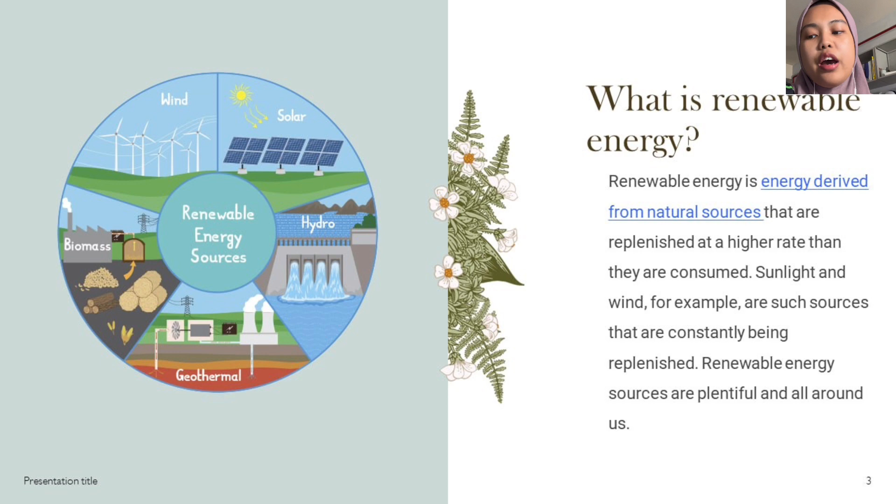What's good about renewable energy? Generating renewable energy creates far lower emissions than burning fossil fuel. Transitioning from fossil fuel, which currently accounts for a lion's share of emissions, to renewable energy is key to addressing the climate crisis.

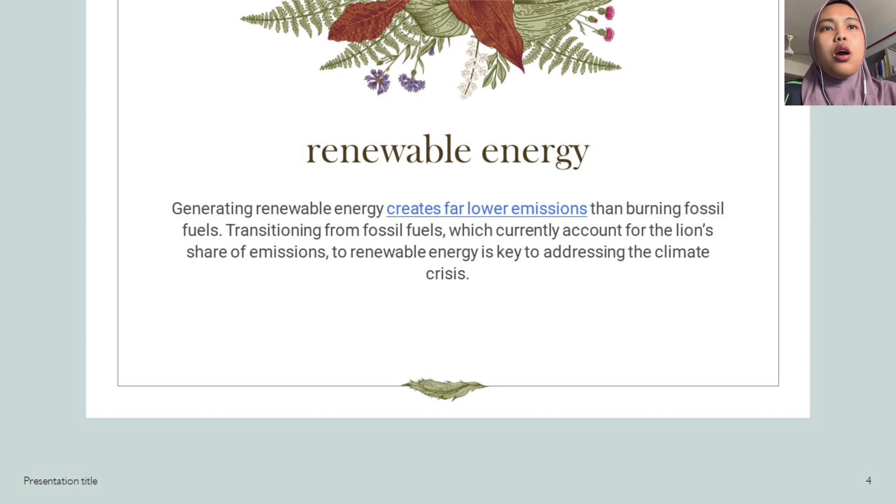Okay, renewable thermal technologies. Renewable energy sources provide heating and cooling service for space heating and cooling, domestic hot water, process heating, and cooking. Renewable thermal technologies can use a variety of renewable energy sources that would otherwise be wasted, such as waste energy from industrial processes or biomass burning.

Renewable thermal technologies vary in the thermal temperatures at which they deliver heating and cooling. Temperature levels are important to define the suitability of different technologies for meeting specific heat requirements in the various end-use sectors. Renewable thermal technologies can range from small domestic applications to larger scale applications used in industrial processes and district heating and cooling networks.

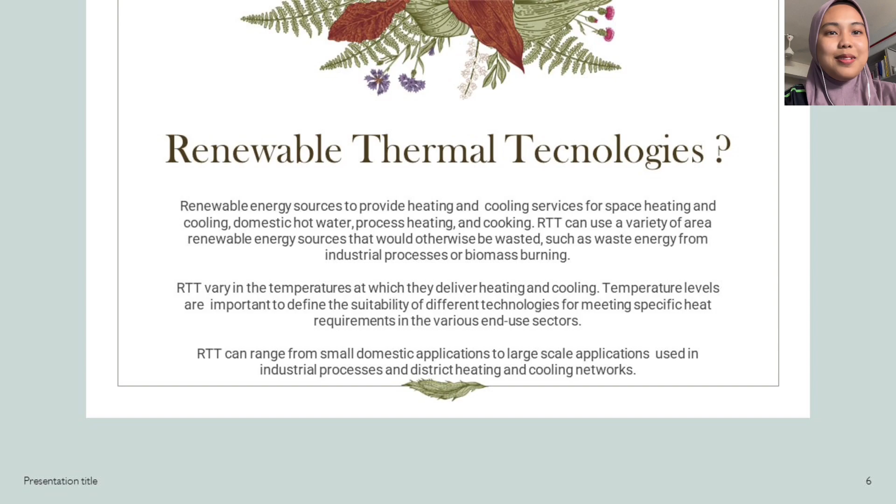Okay, next is what is geothermal energy? Geothermal energy is heat energy from the earth - geo, which is earth, plus thermal, heat. Geothermal resources are reservoirs of hot water that exist or are human-made at varying temperature and depth below the Earth's surface. Geothermal technology exploits thermal energy in the Earth's interior, stored either in rock, liquid water, or trapped steam.

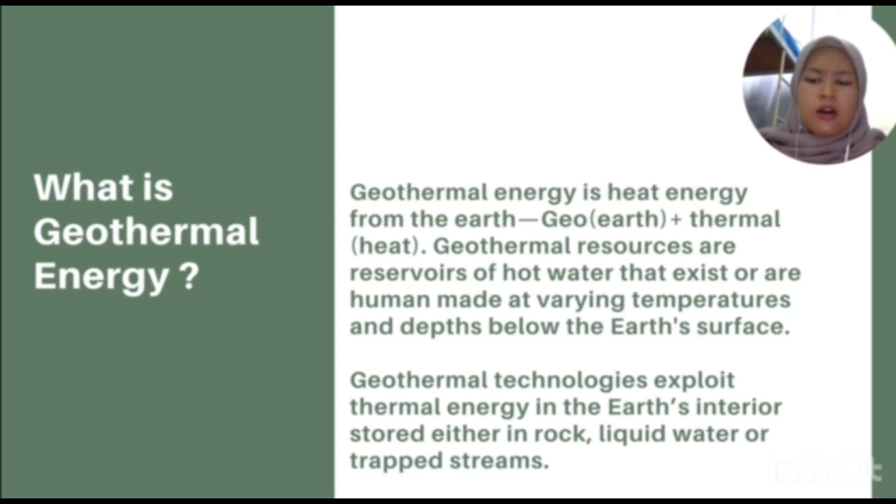So this is basically how geothermal energy is processed in industry. Types of geothermal resources have three types: the first one is hydrothermal system, naturally occurring water or vapor flow such as hot springs or geysers.

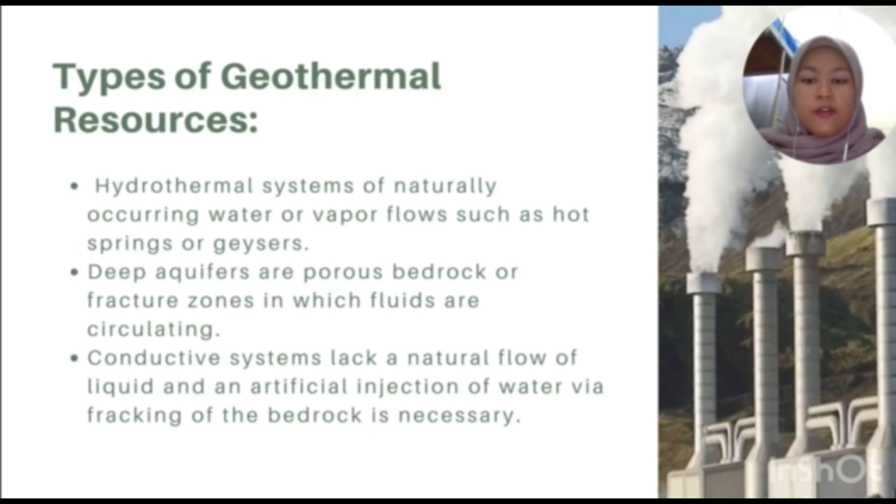Number two, deep aquifer - porous bedrock or fracture zones in which fluids are circulating. Number three is conductive system, lack a natural flow of liquid and an artificial injection of water via fracking of the bedrock is necessary. So next is characteristics of geothermal technology.

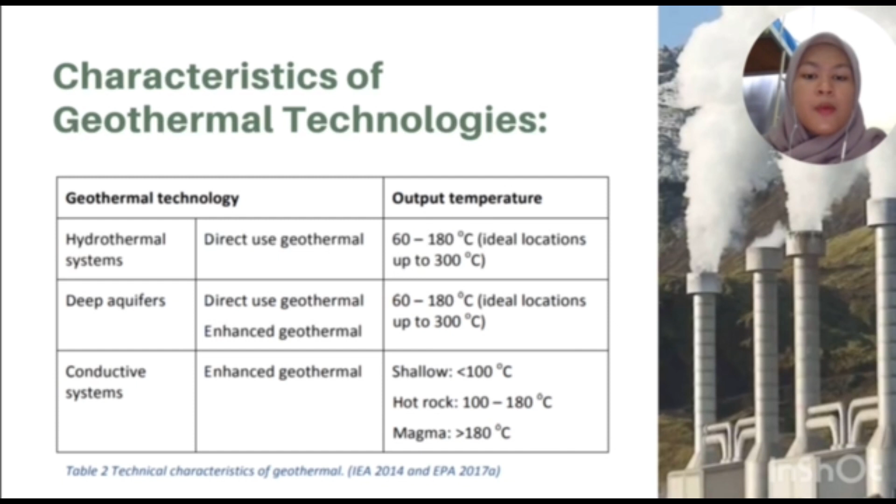The same as the previous slide: number one is hydrothermal system, direct use geothermal, output temperature is 60 to 180 Celsius, ideal location up to 300 Celsius. Deep aquifer, direct use geothermal, enhanced geothermal, 60 to 180 Celsius, ideal location up to 300 Celsius. The last, conductive system, enhanced geothermal: shallow less than 100 Celsius, hot rock 100 to 180 Celsius, and magma more than 180 Celsius.

So the next part I will explain about technology of geothermal in the market. Number one is ground source heat pump. A ground source or geo-exchange system consists of a heat pump connected to a series of buried pipes.

One can install the pipes either in horizontal trenches just below the ground surface or in vertical boreholes that go several hundred feet below ground. For every unit of electricity used in operating the system, the heat pump can deliver as much as 5 times the energy from the ground.

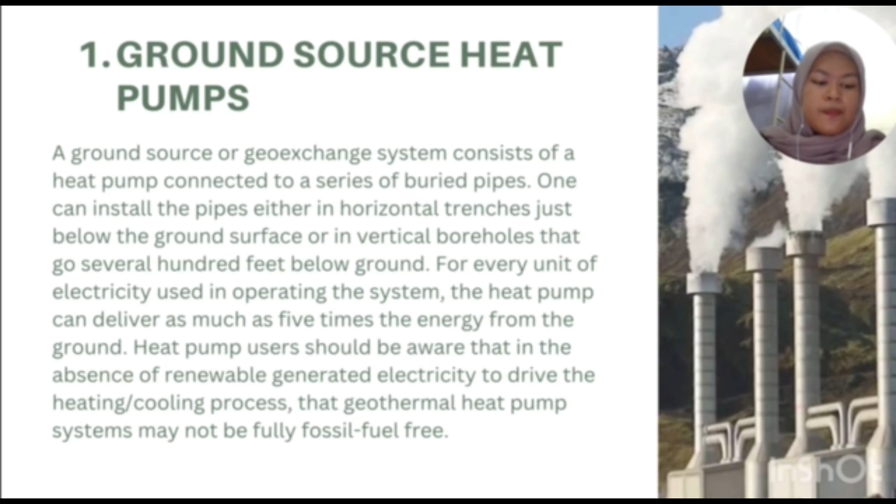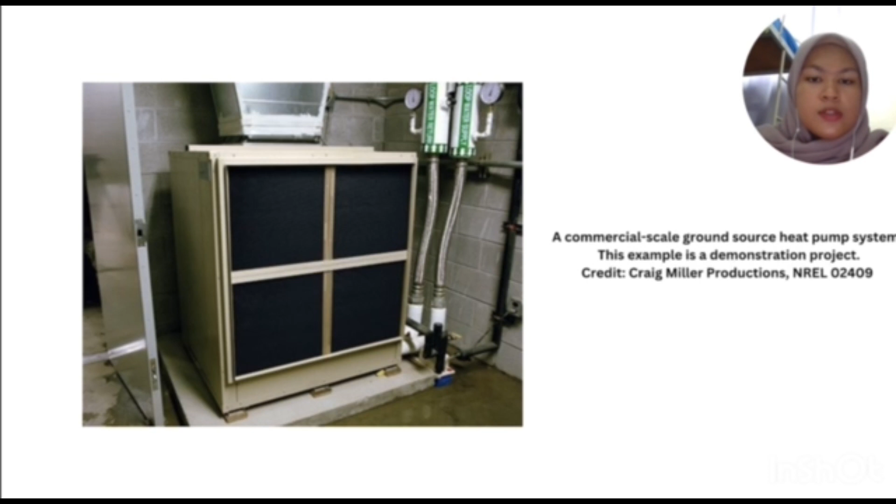Heat pump users should be aware that in the absence of renewably generated electricity to drive the heating or cooling process, the geothermal heat pump system may not be fully fossil fuel free. Okay, so basically this is the heat pump, and this one is a commercial scale ground source heat pump system. This example is a demonstration project, credit to Craig Miller Production NREL 02409. So next I will explain how the heat pump works.

So there are two situations, heating mode and cooling mode. For the heating mode, stage number one is circulation: the above ground heat pump moves water or another fluid through a series of buried pipes, the ground loop. Stage number two, heat absorption: as the fluid passes through the ground loop, it absorbs heat from the warmer soil, rock, or groundwater around it.

Stage number three, heat exchange and use: the heated fluid returns to the building where it is used for useful purposes, such as space or water heating. The system uses a heat exchanger to transfer heat into the building's existing air handling, distribution, and ventilation system, or with the addition of a desuperheater. It can also heat domestic water.

So the last stage is recirculation: once the fluid transfers its heat to the building, it returns at a lower temperature to the ground loop to be heated again. This process is repeated, moving heat from one point to another for the user's benefit and comfort.

So the next situation is cooling mode. Basically, cooling mode is the opposite of the heating mode. Number one is heat exchange and absorption: water or another fluid absorbs heat from the air inside the building through a heat exchanger, which is the way a typical air conditioner works. Number two is circulation: the above ground heat pump moves the heated fluid through a series of buried pipes of the ground loop.

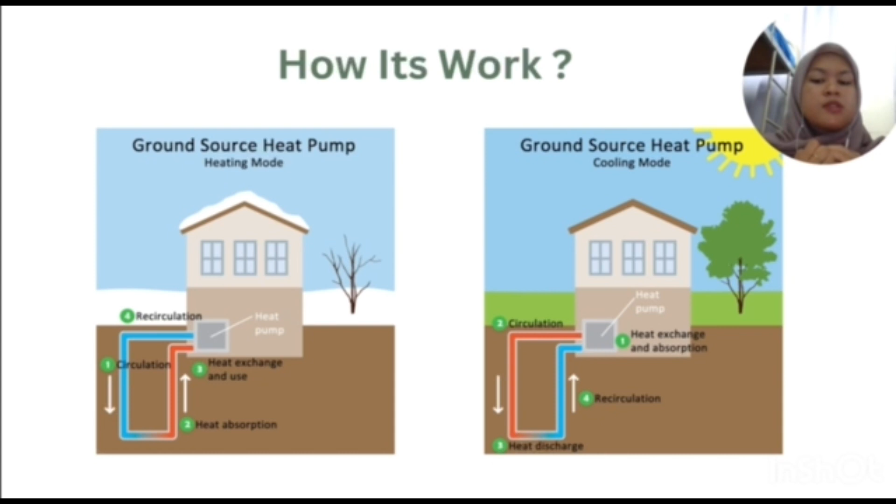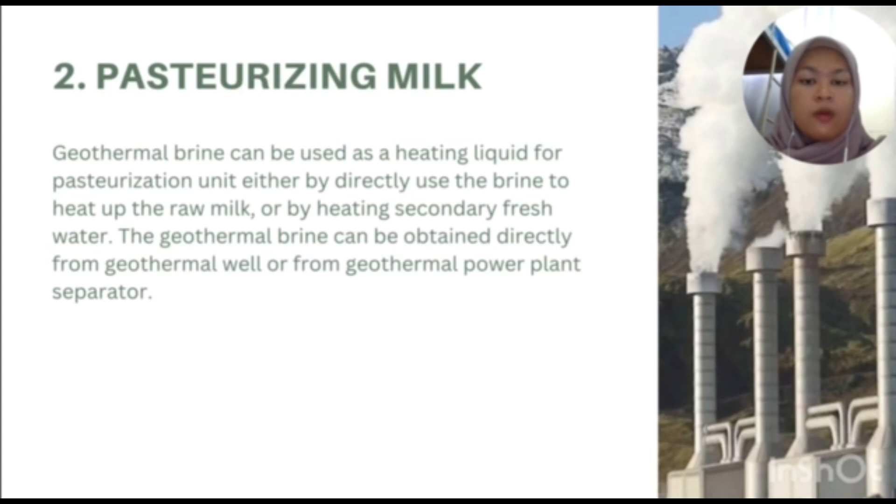The next technology is pasteurizing milk. Geothermal brine can be used as a heating liquid for a pasteurization unit, either by directly using the brine to heat up the raw milk or by heating secondary fresh water. The geothermal brine can be obtained directly from a geothermal well or from a geothermal power plant separator. Okay, basically this is how geothermal milk pasteurization works.

So pasteurization makes sure milk is safe to drink by killing any bacteria and also helps to prolong its shelf life. It involves heating milk to 71.7 Celsius for at least 15 seconds. So geothermal energy can directly power pasteurization plants, making the process more efficient and sustainable.

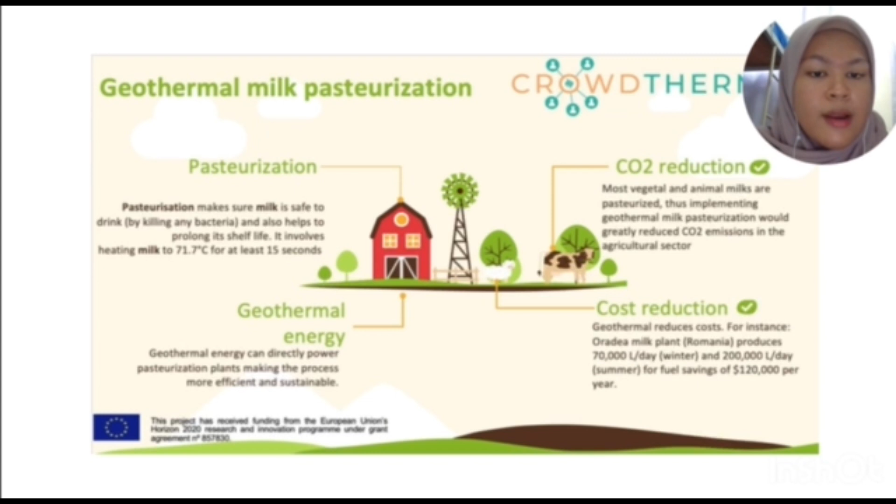Geothermal also reduces costs. For instance, the Oradea milk plant in Romania produces 70,000 litres per day in winter and 200,000 litres per day in summer, for a fuel saving of 120,000 per year. As for CO2 reduction, most vegetable and animal milks are pasteurized. Thus, implementing geothermal milk pasteurization will greatly reduce CO2 emissions in the agriculture sector.

So the third technology of geothermal is energy in aquaculture. The aim of geothermal aquaculture is to heat water to the optimal temperature for aquatic species. This involves the raising of freshwater or marine organisms in a controlled environment to enhance production rates. This geothermal water is commonly used to heat water in raceways, ponds, and tanks. The water temperature depends on the species involved, ranging from 13 to 30 Celsius.

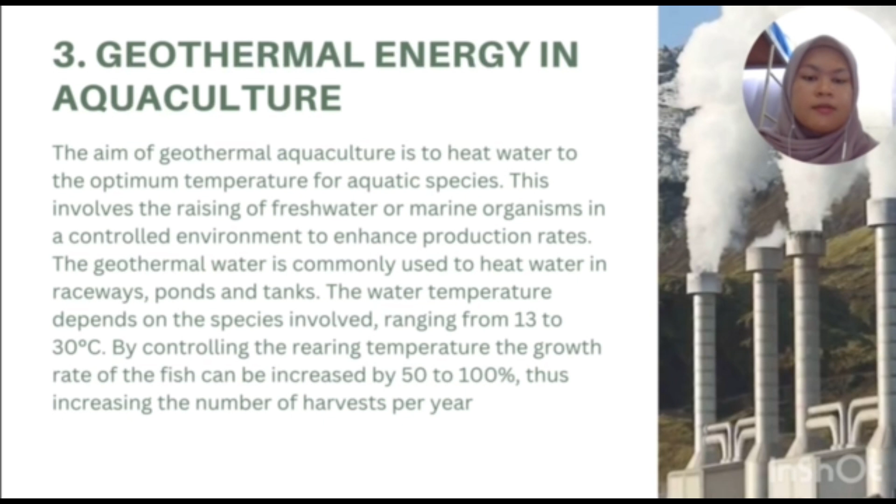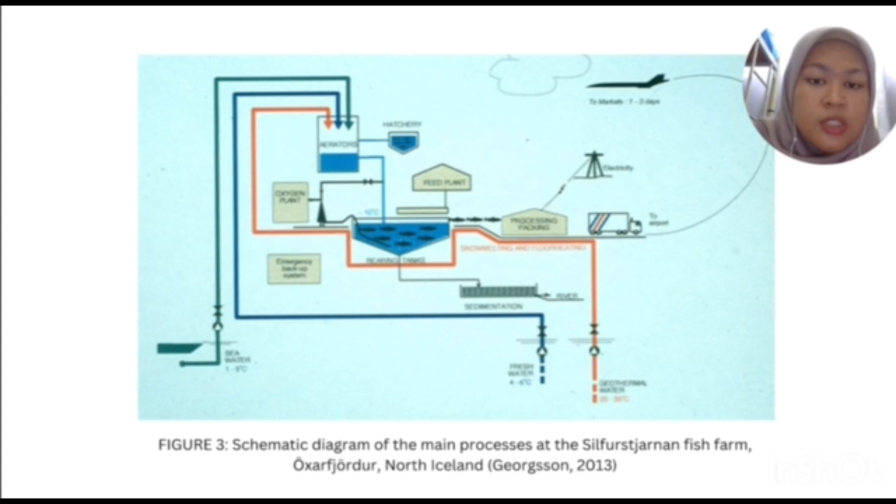By controlling the rearing temperature, the growth rate of the fish can be increased by 50 up to 100%, thus increasing the number of harvests per year. So this figure shows a schematic diagram of the main processes at the Silfurstjarnan Fish Farm, Öxarfjördur, North Iceland, Georgsson, 2013. So this is how geothermal energy is used in aquaculture.

So the last technology is greenhouses. Greenhouses are one of the most prominent uses of geothermal energy in agriculture. These structures protect plants by keeping them at a proper temperature all year, protecting them from harsh cold and hot weather. Farmers use geothermal energy to heat them and can use geothermal water in the pipes to adjust humidity levels if needed. This power source helps crops grow faster and be more reliable.

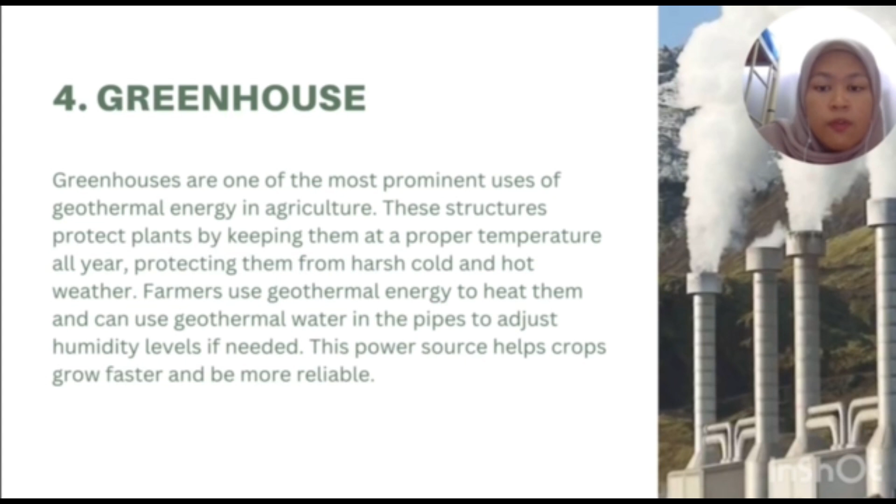So this figure shows how a greenhouse works with geothermal energy. Number one, we can see during the winter months, cold air is pulled from the structure and passes through underground piping where it picks up heat energy. The next picture is during the summer months, warm air is pulled from the structure and passes through underground piping where it releases heat energy.

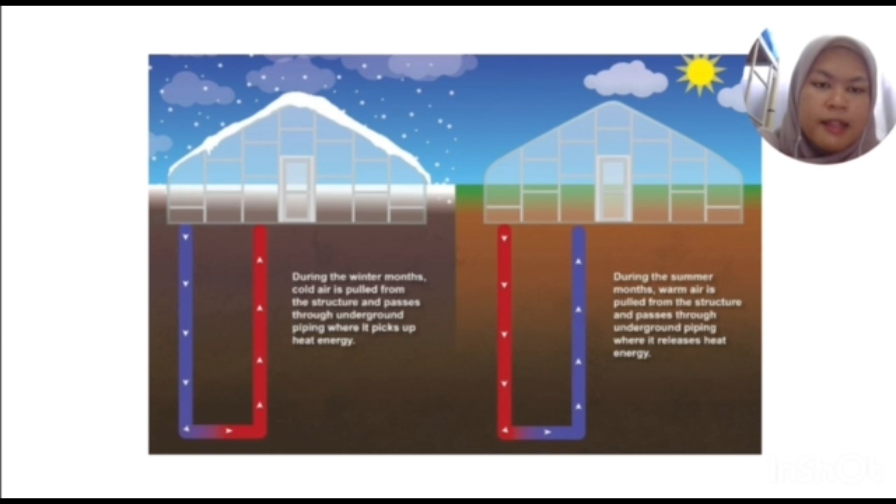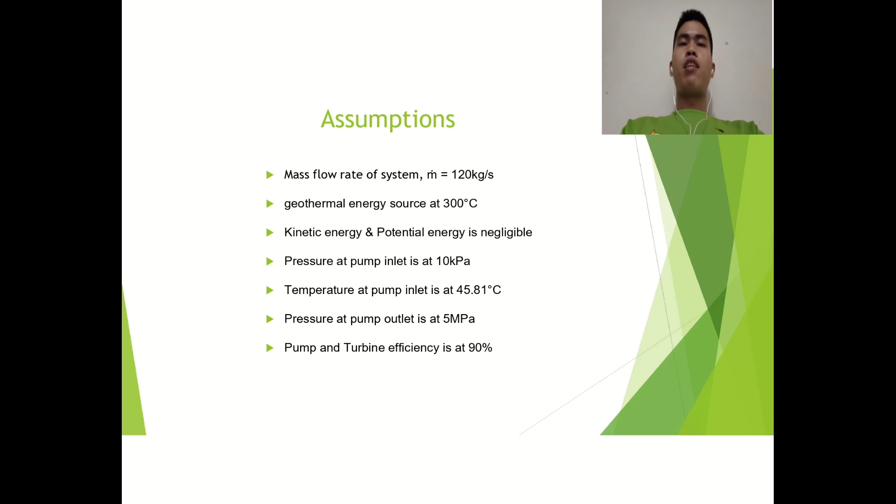Number four, the pressure at the pump inlet is 10 kilopascals. Number five, the temperature at the pump inlet is 45.81 degrees Celsius. Number six, the pressure at the pump outlet is 5 megapascals. And the last one, pump and turbine efficiency is 90% because we are designing an actual power plant.

Secondly, the superheated vapor will drive the turbine at high temperature and pressure, generating power using a generator. In this process, the superheated vapor will return to a water mixture state. Lastly, the water is cooled in the cooling tower, producing steam out of the cooling tower. This process is to make sure that the water that goes into the pump is at a lower temperature so that the pump will not be broken easily.

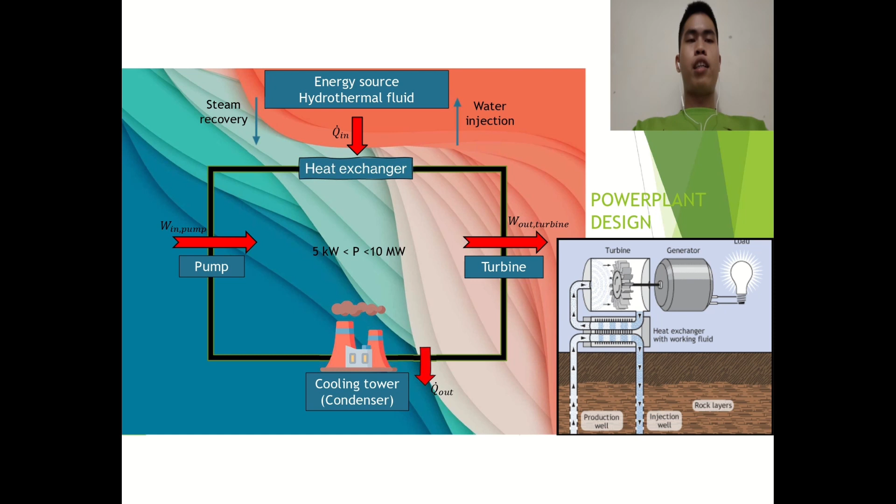This process is in a cycle which we call a Rankine cycle. In this diagram, we can see what a Rankine cycle looks like. It represents the process that happens in the power plant. In order to design a power plant in the range of 5 kilowatt to 10 megawatt using geothermal energy, the Rankine cycle is used because the working fluid of the power plant is water. Water is heated to a superheated vapor state and drives the turbine to generate power.

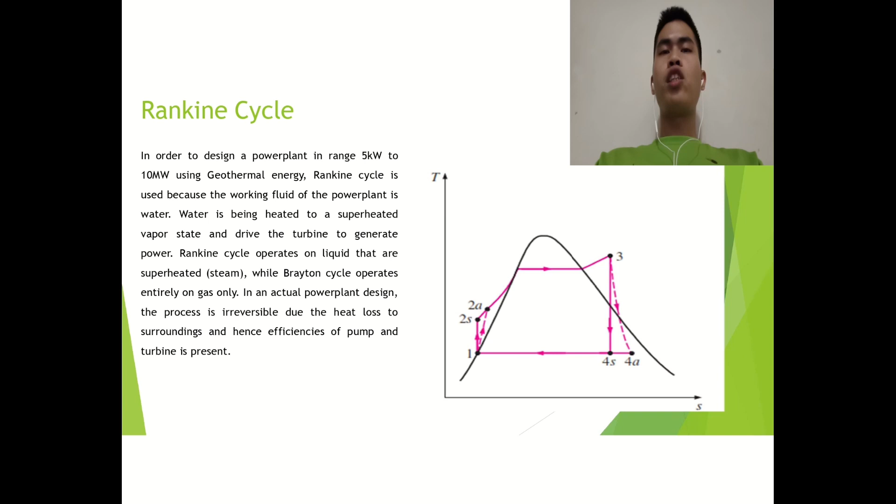The Rankine cycle operates on liquid that is superheated, which is steam, while the Brayton cycle operates entirely on gas only. In an actual power plant design, the process is irreversible due to the heat loss to surroundings, and hence, efficiencies of the pump and turbine are present.

For the calculation of the power plant design, W net equals Q dot in minus Q dot out, equal to M dot divide, in bracket H3 minus H2A, minus in bracket H4A minus H1. Okay, first things first, we have to find H1, H2A, H3 and H4A.

To find H2A, we can assume that temperature at state 1 equals 45.81 degrees Celsius and pressure at state 1 equals 10 kPa. We refer to table A5 and then we can get entropy at state 1, and then we refer to table A7. We do the interpolation and then we can get H2S, which is H2 ideal, and then we find H2A actual using pump efficiency, and then we get H2 actual equal to 197.99 kJ/kg.

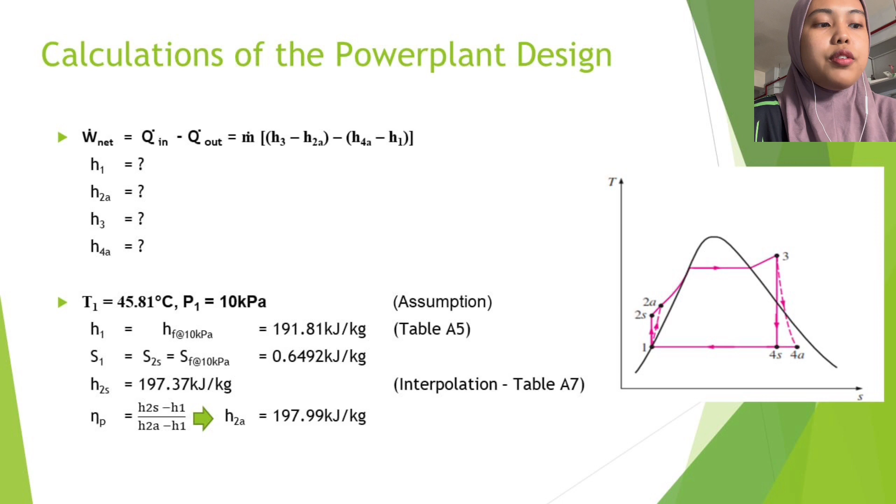And then we find H4A. We assume T3 equals 300 Celsius and P3 equals 5 MPa. Refer to table A6 and then we can get the entropy at state 3, and then we do interpolation using the turbine efficiency, and then we can get H actual at state 4 equal to 2061.84 kJ/kg.

And last, we can get W net equal to 120 divide, in bracket 2925.7 minus 197.99, minus in bracket 2061.84 minus 191.81, so the net work W net equals 102.93 kilowatt.

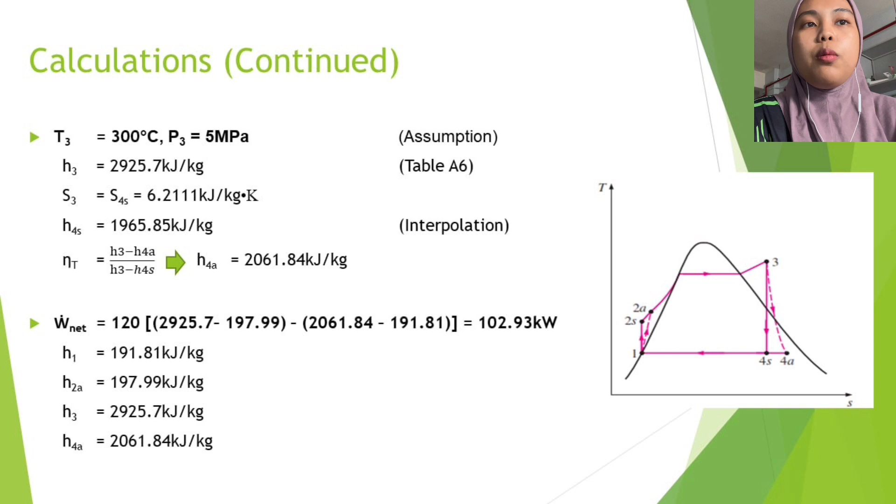How to find pump and turbine efficiencies? Pump efficiency equals ideal pump work divided by actual pump work, which is WS divide WA. And the turbine efficiency we can find using actual turbine work divided by ideal turbine work, which is WA for turbine divide WS for turbine.

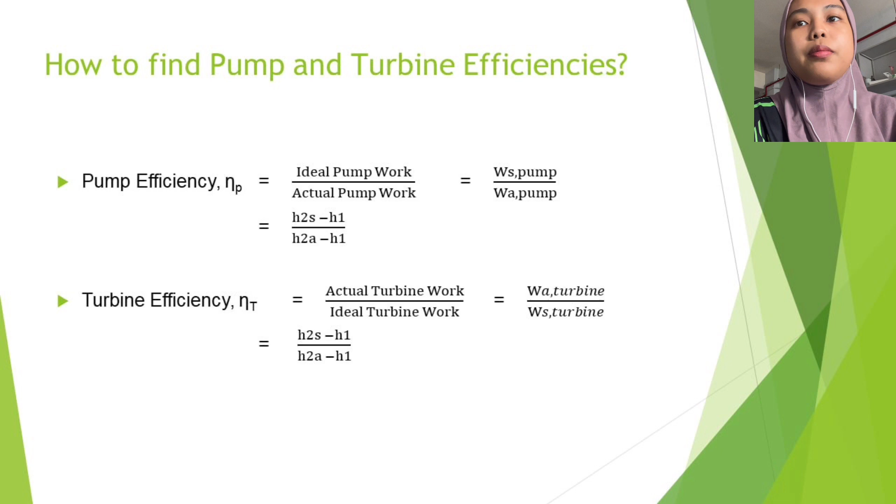Improvements. The power plant design can be improved by the following steps. First, increase mass flow rate of water. Second, higher temperature of the geothermal source. And the last one is to add a regenerative process, which is reheating.

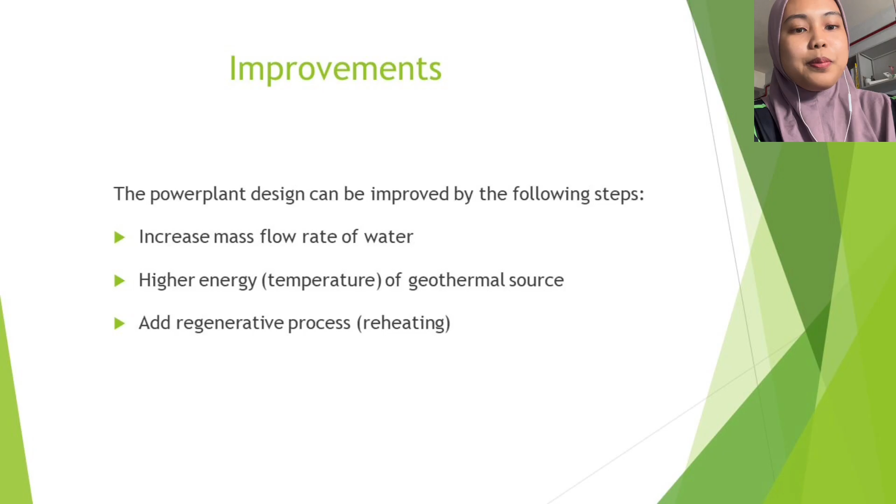2200191, and I want to talk about the potential of renewable energy, which is geothermal energy, in Malaysia. So there are 5 renewable energies in Malaysia, which are biomass, biogas, geothermal, hydro power and solar. So there are 3 places which have potential for geothermal energy.

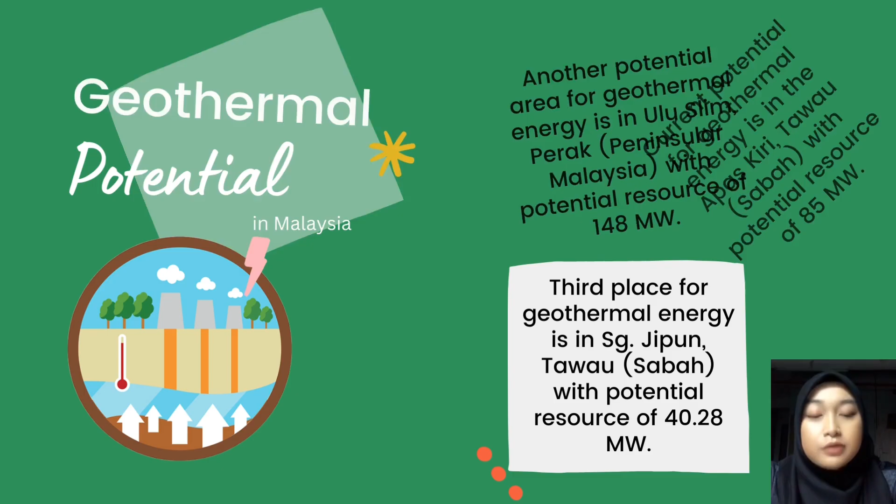The first one is in Apas Kiri, Tawau, which is in Sabah, with potential resource of 85 megawatts. Second one is in Ulu Slim, Perak, which is in Peninsula Malaysia, with potential resource of 148 megawatts. And the last one is in Sungai Jipun, Tawau, Sabah, with potential resource of 40.28 megawatts. So next I want to talk about the advantages of geothermal energy in Malaysia.

The first one is silent energy. Geothermal power plants produce negligible and imperceptible noise levels during the construction of the plants, including excavation. A certain amount of noise is inevitable, but once construction is complete, everything is silent.

The second one is geothermal energy is always available. Aside from being essentially unlimited like many other renewables, geothermal energy is always available. On average, a geothermal power plant will produce energy for around 8,600 hours per year, while for a solar plant the average is around 2,000 hours per year, so geothermal is higher than solar plants.

Next one is it allows double recycling. Geothermal power optimizes resources. On the one hand, the plants have components that can be salvaged and reused at the end of the installation life cycle. On the other, during operation, the flows are organized in such a way as to put any heat that cannot be used immediately back into the circuit using the steam pipes that power the plant, helping to save energy.

Then, the next point is the Earth's heat can also cool. When geothermal energy is mentioned, we think first and foremost of thermal energy and heating. Geothermal plants are designed to both heat and cool. This is why, aside from the large station, geothermal power systems can be installed in almost any type of building, from homes to shopping malls, public buildings, and sports centers.

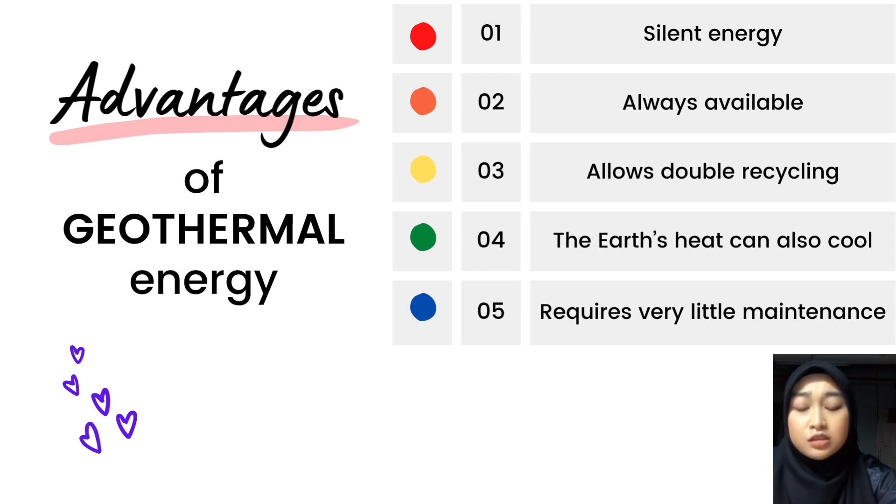And the last point is geothermal energy requires very little maintenance. Particularly when it comes to domestic use, geothermal plants do not require any special maintenance. As they are closed systems, the pressure of the fluid in the piping self-regulates, and the number of electrical and mechanical elements that can break down is also very small. So those are all the advantages of geothermal energy.